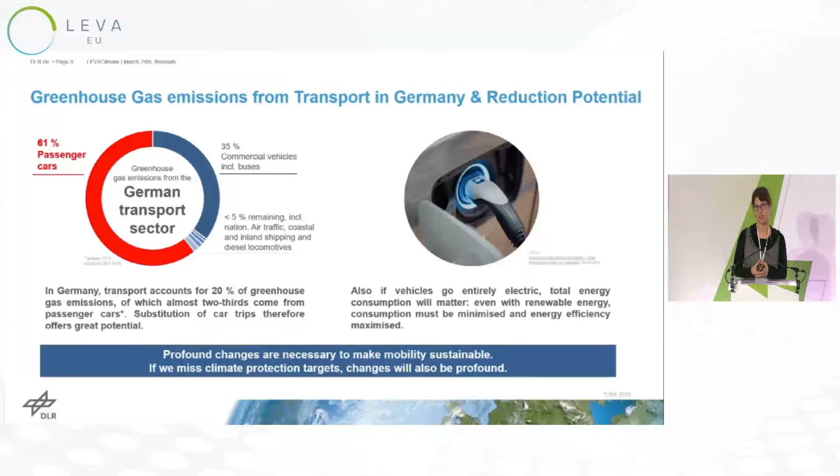So we must find a way to minimize energy consumption and to maximize energy efficiency. And this means we need to go beyond a mere substitution of the drivetrain technology. But this also means profound changes are necessary to make mobility sustainable, which is very challenging. And on the other hand, if we miss climate protection targets, the changes will also be very profound.

Before I come to the study itself, I would like to introduce you to a range of light electric vehicles, or LEVs as they are abbreviated. The term covers a wide variety of vehicles, which you can see here with examples to give you a better impression. On the left side, you see an electric scooter. Then we have an electric bike, which saw a huge success on the market in the last years. I mean, in general, not this model, but all electric bikes. And then we have a cargo bicycle, we have electric mopeds, and we have electric motorcycles, and something that we call microcars. You see that with 4 examples here on the right side.

So we have very different vehicles under this term of LEVs, and we have vehicles with rather low speed, around 20 or 25 kilometers per hour, and we have vehicles with high speeds of over 100 kilometers per hour or almost 100. For example, we have this Microlino here with 90 kilometers per hour, or the Nobe with 125. Most vehicles you see here are on the market, or they will be on the market soon.

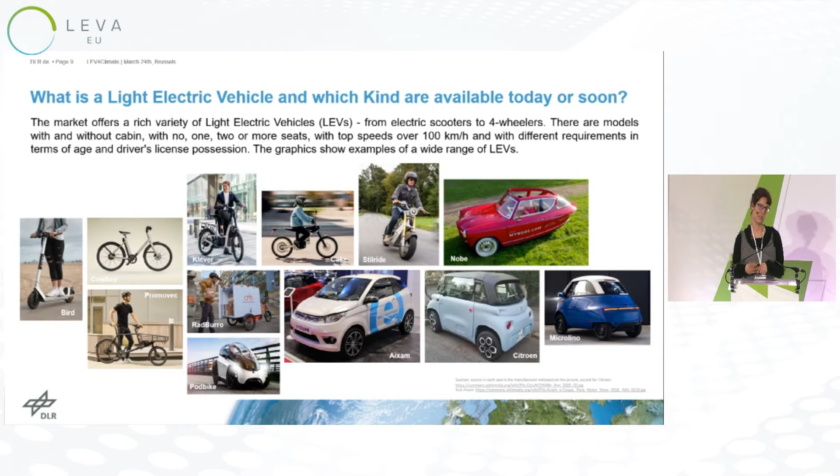So why is it worth evaluating the potential of light electric vehicles? Like the name already suggests, they are lightweight, and that means that you can save energy for propulsion. If you compare the weight of a typical LEV, a heavier one, a microcar, then it has around 500 kilograms. In comparison, an average new car in Germany in 2020 had a weight of 1,600 kilograms. That is 3 times more than the LEV. And the heavier the car, the more energy you need for moving the car itself and not the passengers or goods. In Germany, we have an average occupancy rate of 1.4 persons per car, which is only around 100 kilograms then.

And you see this energy consumption and the advantage of the LEVs also in the chart on the right side. We compare an e-bike, a microcar, and a battery electric car. And as we have very different vehicles within each category, we show a range of energy consumption with these blue bars. They indicate the amount of energy that you need per 100 kilometers. And it's clear that the LEVs need considerably less energy than the electric car. And the less energy you need, the less energy you need to produce, and that is symbolized by these wind power plants here.

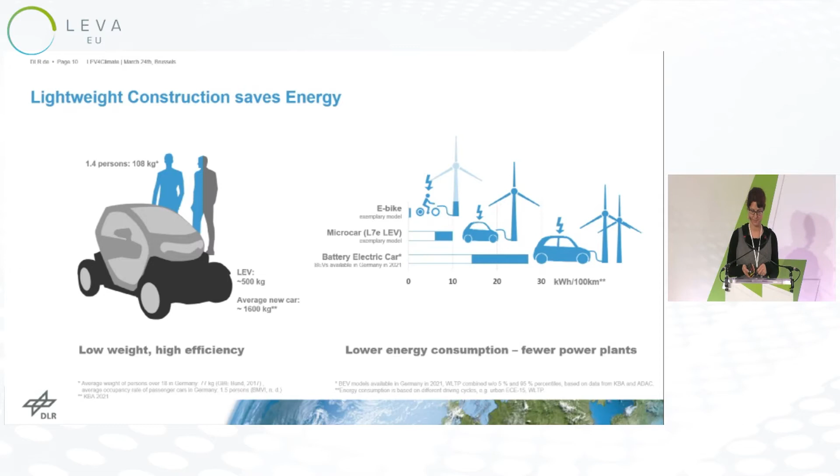If you need not so much energy to move the car and the passenger and goods, then you could use smaller batteries. This is very important because the batteries are made out of critical raw materials partly, and also the production of batteries is related to greenhouse gas emissions. And the emissions are proportional to the size and capacity of the battery, which is shown in the graph on the left side. We again compare 3 different categories, again, an e-bike, a microcar, and a battery electric car, and you clearly see the high amount of emissions that you need for a large battery.

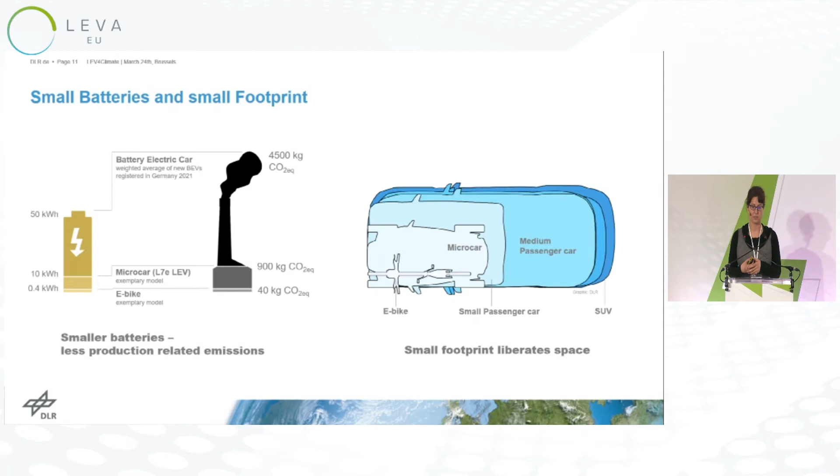Another aspect of LEVs is the small footprint. That was not scope of our study, but still we would like to mention it because it also offers great opportunities for city planning and efficient use of space. And you can see that with the graph here on the right side.

So despite their positive properties, LEVs still lead a niche existence on the market on one side, but also in research and on the political agenda. And that's why we evaluated with our study the research questions: to what extent might LEVs substitute car trips, and related to this, how much CO2 equivalents might be saved with LEVs.

And I will now show you the approach, how we investigated these questions. You can see it here at one glance, the complete process. I will go step by step through it, and Simone and Mirko will add details with their slides. So first we started with a definition of an exemplary set of LEVs. And we also defined analysis criteria for the trip substitution.

And then we took a representative national travel survey from Germany, which describes an average day in Germany. And on this basis, we analyzed which car trips could be substituted, and also important, with which kind of LEVs it could be substituted. In most cases, a car trip cannot be only substituted by one type of LEVs, but by several. For example, an electric moped or motorcycle or a microcar.

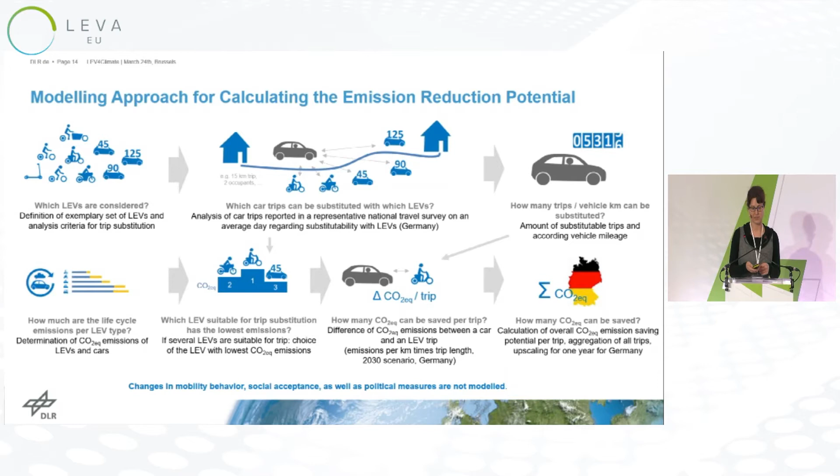So here you can see the 9 LEV categories we used for our analysis. First, an e-scooter, then we have an electric bike that goes up to 25 kilometers per hour. We have a vehicle we call e-bike plus that allows for cargo, also transport of children. Up to 3 children could be transported here.

Then we have a speed pedelec that has a maximum design speed of 45 kilometers per hour, a moped with the same speed, a motorcycle with a speed of 120 kilometers per hour, and then we have 3 different types of microcars, one with 3 wheels, which has a maximum speed of 125 kilometers per hour, and 2 with 4 wheels, which are 45 and 90 kilometers per hour.

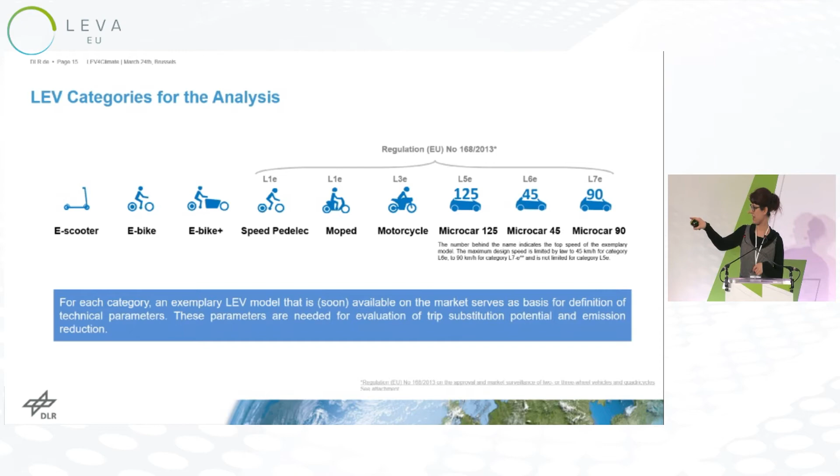They are in this order because they are classified as different categories according to the EU regulation 168 from 2013. And this regulation limits the speed of the vehicles L6E and L7E, but it does not limit the speed for L5E. The speed we show here was chosen by us for the study.

And for each category, we chose an exemplary LEV model, which is now available on the market or will soon be available on the market. And we took the technical parameters from these vehicles for the analysis of the trip substitution potential and also of the emission reduction.

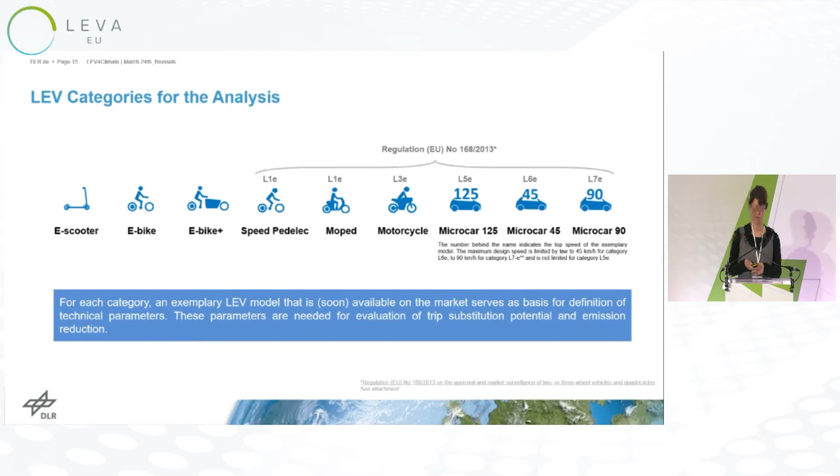Here you can see an overview of the properties that we used for the analysis. We have, on the one side, parameters that influence the trip substitution, and then we have parameters we need for the calculation of the CO2 equivalent emissions. Partly we derived the parameters, as I said, from exemplary models that we chose, for example, for the battery capacity or the weight of the vehicles. And then we have other parameters that we defined.

We did this by a review of literature and also in discussion with other experts. An example for this kind of parameter would be the relevant travel distance. That's a distance that we defined to be well rideable with an LEV for the different categories. I will go through the numbers of one category, and then I think the principle will be clear. I choose the electric bike as an example.

It has a maximum speed of 25 kilometers per hour with electrical support. The relevant travel distance in our analysis was defined as 15 kilometers for one way and for a round trip with 30. So that would mean, for example, you travel 15 kilometers in the morning to work and 15 back again. For the number of occupants, that's obviously 1 for a bike. Trip purpose was defined as the e-bike is suitable for all purposes, excluding accompaniment of persons and also excluding some shopping purposes, for example, for very large objects.

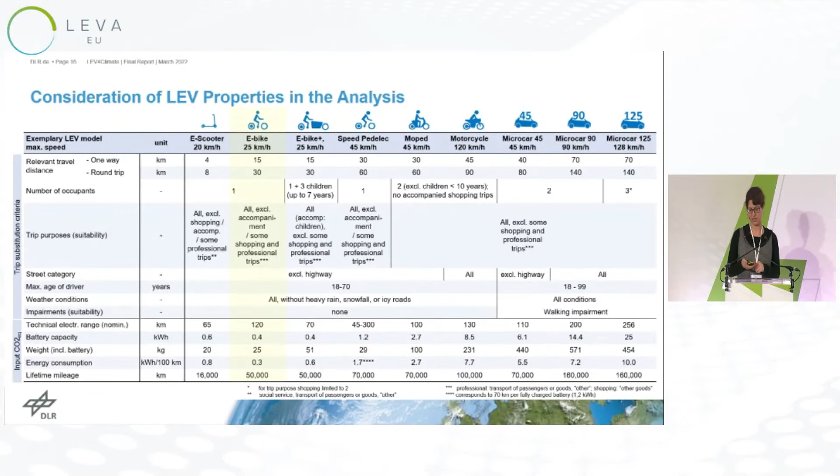And the battery capacity, the technical range is 120 kilometers for the e-bike. You see here that it's much more than what we defined as relevant travel distance. We have a battery capacity of 400 watt hours, a weight of 25 kilograms, an energy consumption of 300 watt hours per 100 kilometers, and a lifetime mileage of 50,000 kilometers. And then I hand over to Mirko for the trip substitution potential.

Thank you, Mascha. So I would like to speak about the trip substitution potential. For those who haven't been here, I'll repeat basically what I said in the morning. Under trip substitution potential, we understand the amount of kilometers that cars currently drive that we can replace by LEVs. So firstly, I'm going to talk about the database that we used to derive this trip substitution potential. To do so, we used the German National Travel Household Survey, which is called MID, in its most recent version from 2017. MID is a quite large data set that comprises all regions in Germany, from rural areas up to the city level, with about 960,000 trips from 316,000 people and about 156,000 households.

And the data set includes not only information about trips typical for such surveys, but also socioeconomic information such as the income, the number of people living in a household, the housing situation, and also what kind of car is available in such a household. By using MID, we can create a picture of the day-to-day mobility in Germany, and therefore we can use it to derive the substitution potential.

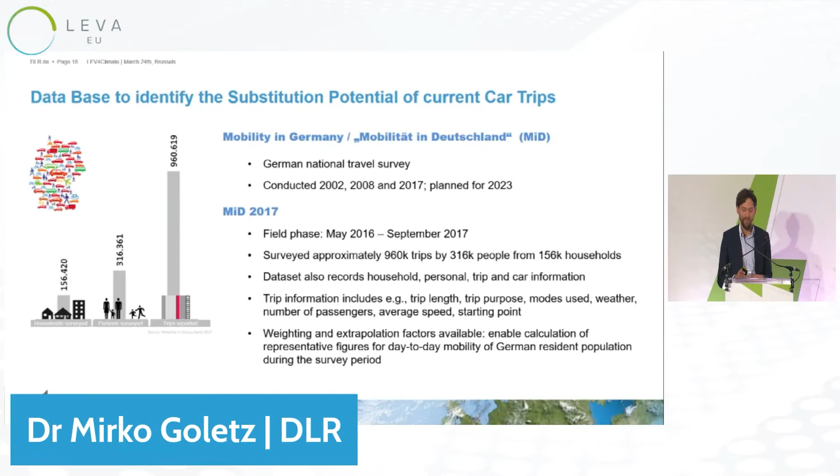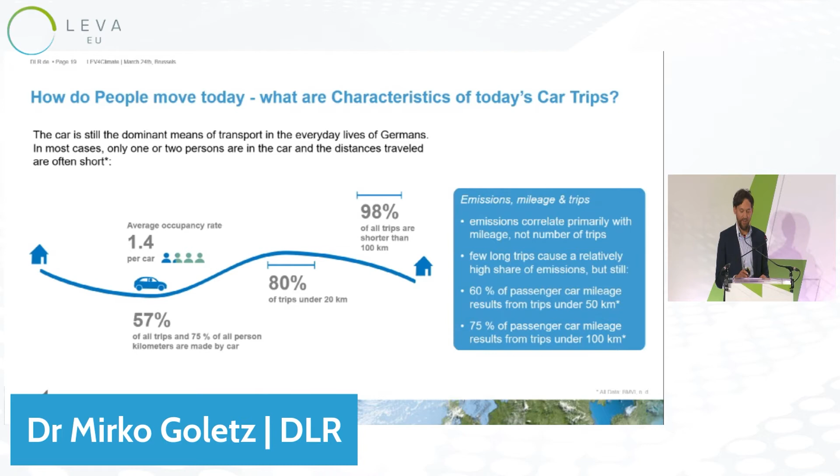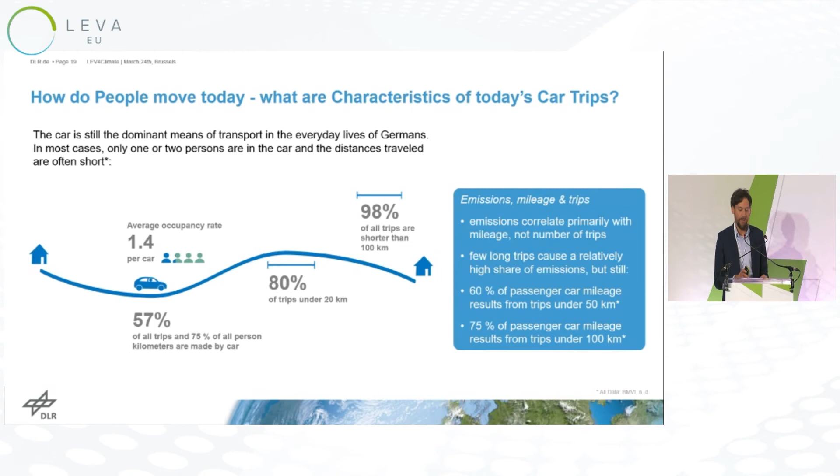Let us take a look at how the mobility situation in Germany currently looks in relation to car trips. The car is the most relevant mode of transport in Germany. About 57% of all trips in Germany are currently carried out by car, despite many trips being quite short: 80% are below 20 kilometers and 98% are even below 100 kilometers. And even though many cars have seating capacity for 4 to 5 people, the occupancy rate is usually quite low. 1.4 people on average are seated in a car. So what can we do with this to derive the trip substitution potential?

Mascha just introduced the different kinds of vehicles that we included in our study, the LEVs. What we did was we looked at each and every trip in MID and checked whether it's suitable to be replaced by LEVs. To do so, we went through different criteria that we previously defined, listed here on the left-hand side. We looked at the length of the trip and the purpose of the trip. We also looked at whether the driver had the appropriate age to be, in our understanding, able to drive such a vehicle. We looked at the weather, whether the person has some sort of impairment, and also how many people actually carried out such a trip. And then we compared all these criteria and looked whether each and every LEV is suitable.

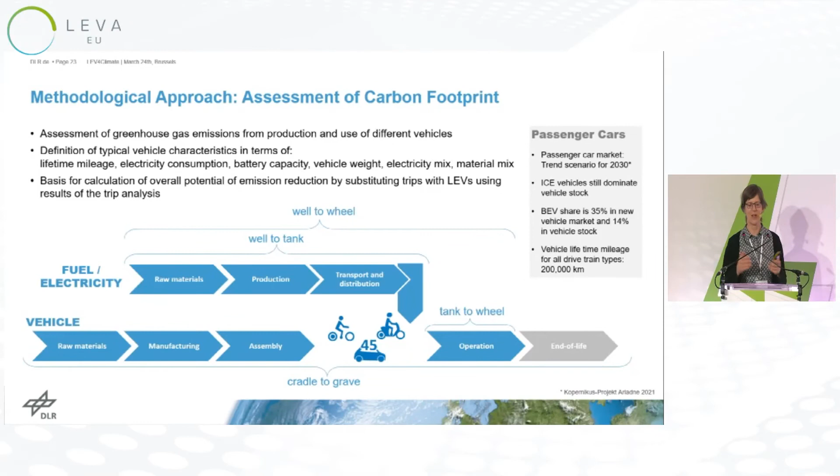So we now identified the trips that can be substituted, but what does that mean for emission reduction potential? So to calculate this, we first have to set our system boundaries. And we not only considered the vehicle operation, but we also considered the vehicle production, not only of the LEVs but of the passenger cars as well, of course. And we also included the fuel and electricity production. And as a reference for the passenger car market, we referred to a 2030 scenario, which in Germany implies a higher share of battery electric vehicles, for example, and also the electricity mix will change within the next years up to 2030. We did not include the end of life of the vehicles, so basically this is a cradle to gate approach in that sense.

When we look at the vehicle production for the light electric vehicles, we built a model to calculate the greenhouse gas emissions for every single type or category of LEV. And the main influencing factors, of course, are the materials that are used for the vehicle and also the battery that is used and the capacity of the battery. So if you have a larger battery, of course, this has a large impact on the overall vehicle production emissions. But still, this is less compared to a mid-class battery electric passenger car.

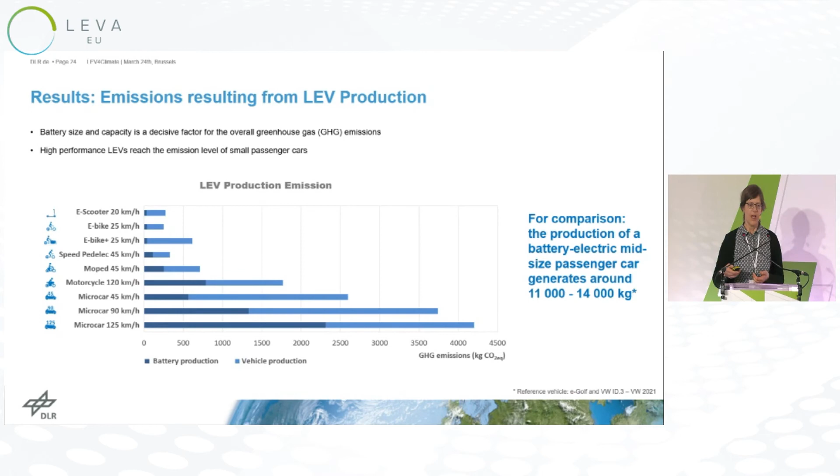And if we want to analyze the emission reduction potential for our trips, of course, we need to know the greenhouse gas emissions per kilometer. So we include not only the vehicle production, but also the vehicle operation and electricity emissions that are needed to drive the vehicle. And for the passenger cars, of course, there are also some conventional cars still in the market in 2030, so they also emit greenhouse gases or CO2 during vehicle operation. And another influencing factor, of course, is the overall lifetime mileage, which Mascha also already explained.

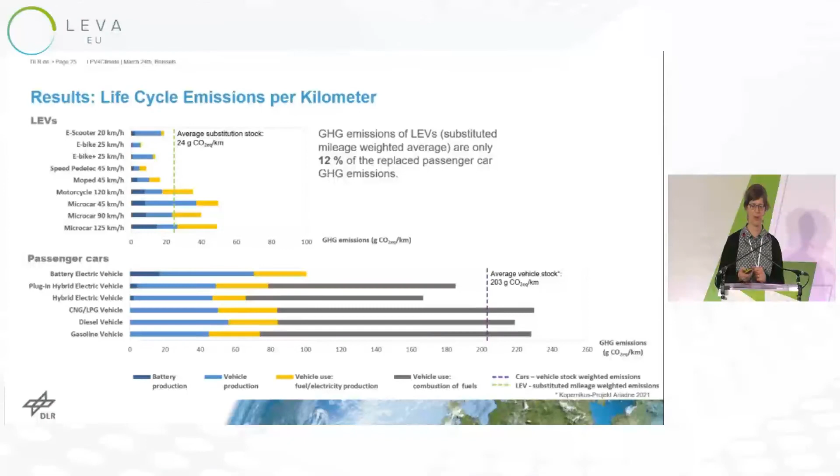And when we consider the trips that we replace, we have an average emission for the LEV fleet of 24 grams of greenhouse gases per kilometer versus the average passenger car, which emits around 200 grams of greenhouse gas emissions per kilometer. So LEVs have only about 12% of the passenger car emissions. And if we analyze our overall substituted trips, when we do those trips with passenger cars, we get to emissions of 130 million tons per year. And if we only have the LEVs on these trips, we can reduce this amount of emissions by 44%, which is considerable, I think. And most of this potential comes from smaller LEVs, but microcars and motorcycles also play a major role.

And we analyzed this for an average day in Germany, and if we assume that this happens throughout the year, the absolute amount of emission reduction is 57 million tons of greenhouse gases per year, which already includes the production of the material. So this is not only transport emissions as such, if you think in sectoral categories. And what we conclude from our calculations will be presented by Mascha now.

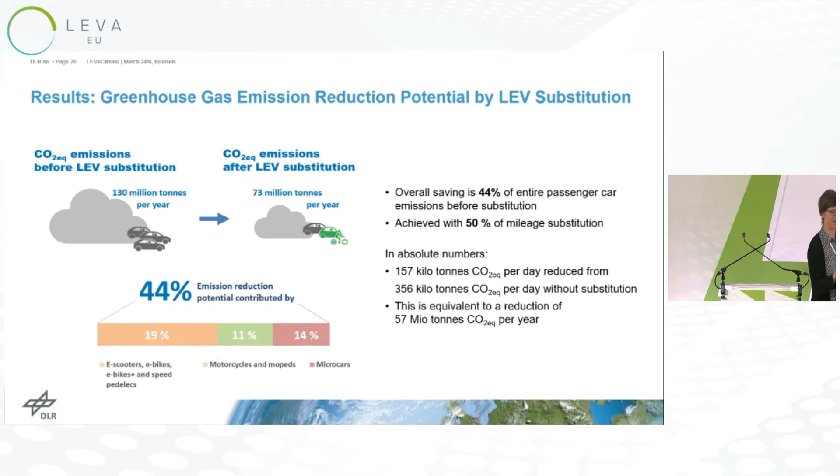Yeah, then I will summarize our results. As Simone just said, we found that up to 44% of the CO2 equivalent emissions could, in theory, be saved by replacing 3/4 of the car trips in Germany, and that would mean that half of the kilometers would be replaced with LEVs for saving this amount of CO2 equivalent emissions. In total numbers, that would be 57 million tons CO2 equivalent per year.

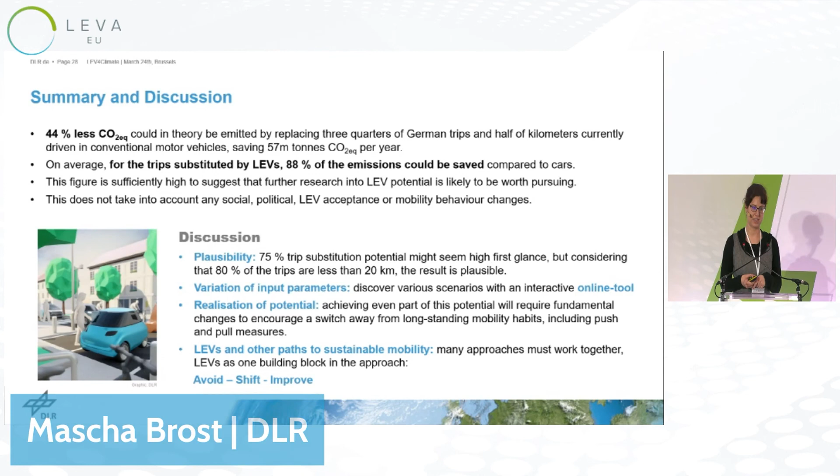If we just look at the trips substituted by LEVs, then we would have a reduction of 88% of the emissions. So that relates to the number of 12%, what Simone just said. The LEVs emit only 12% of the greenhouse gases compared to cars, so we save 88%. And these figures are sufficiently high to suggest that further research into this topic is likely to be worth pursuing.

Again, we would like to point out that we did not take into account any social or political or acceptance aspects or mobility behavior changes, but these are very important topics, of course, and should be addressed by other studies. If we have a look at the results, 75% of the substitution of trips might seem very high, but if you keep in mind that 80% of the trips are shorter than 20 kilometers, then this result is plausible.

If you would like to play around a little bit with the numbers, we have an online tool where you can discover various scenarios. There you can vary, for example, the lifetime mileage or the relevant travel distance and see how that influences the results.

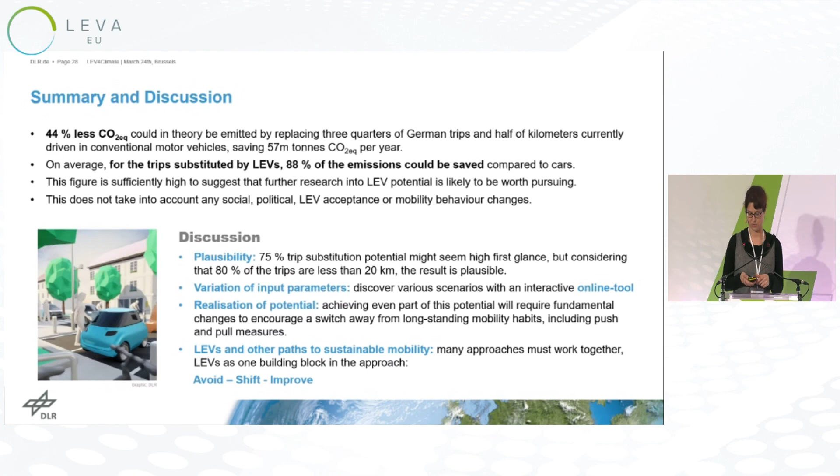Yeah, as a conclusion, we think that the potential of LEVs to support climate change mitigation is really significant. And this promise suggests that further investigation is urgently called for, and further investigation should also include social, ecological, economic, safety and planning implications. Examples for research questions would be: what kind of specific changes are necessary in order to realize at least parts of the potential that was found by this study?

And how could we change transport systems and adapt them so that LEV safety can be maximized? And also, how can we adapt the vehicles to increase the safety? LEVs, as mentioned in the beginning of the presentation, also offer opportunities for urban planning, which could be an interesting subject of studies. And important is, how can adoption of LEVs be accelerated, because we don't have time to wait with measures to protect our climate. Climate change doesn't wait for us, and so we need to act fast.

Yeah, without fundamental changes in many fields, we think that LEVs' potential will not be extensively realized. That means there's a lot of work to do, but the potential is really promising.

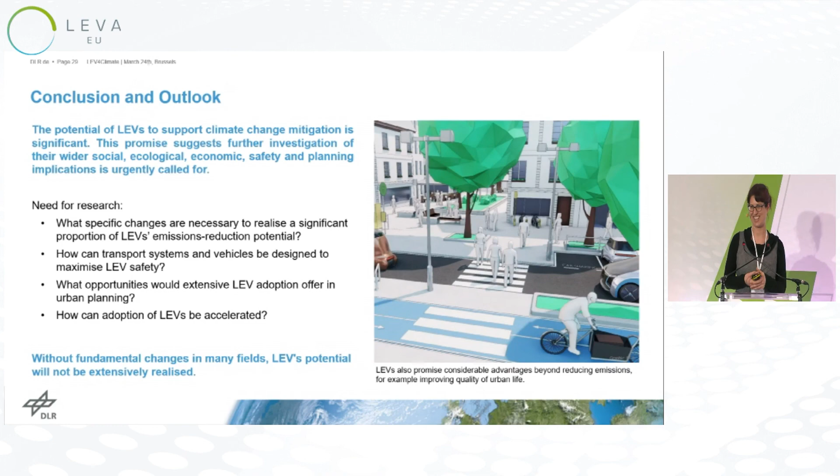Okay, so if there are any questions of scientific fact after that deep treatment of this, we shall take them now. Can we wait until the microphone arrives with you, please?

Thank you. It's a question that comes to everybody's mind at the moment of the big choice: what do we buy? And I would like to just remind you that there is a hybrid solution, and presently it is very much accepted by the public, by the consumers, and it's a very good market sector. Hybrid, they say, okay, we got both. So is it to consider in the framework of this kind of vehicle?

One. Second, is it a transitional solution which can help to go to straightforward electric and only electric vehicles? Or do you consider this hybrid solution as a sustainable, permanent model choice? Just, well, one of them. Thank you. I'm wondering if we should introduce the scientific panel now, because a number of the points the lady mentioned are relevant there.